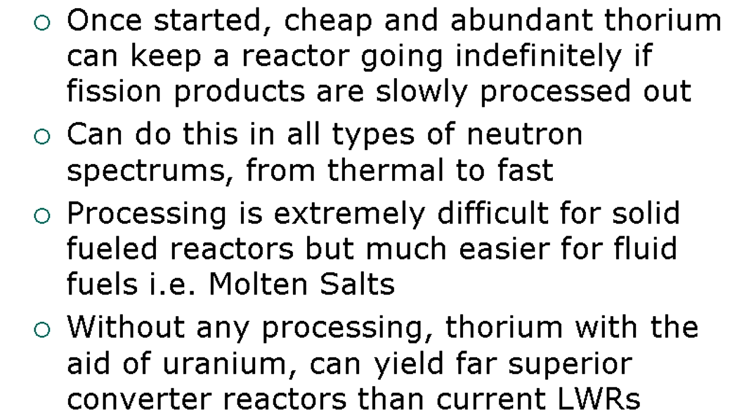Thorium is not fissile on its own. It doesn't fission on its own. We need a little bit of fissile material to start these up. Once started, though, we can run these on cheap and abundant thorium and keep the reactor going indefinitely on this. The great thing with thorium and the U-233 chain, it can be done in any type of neutron spectrum, from the more common thermal to the less used fast spectrum.

Processing of thorium, or processing in general, is extremely difficult for solid fuel reactors. That's why there's a little bit of interest worldwide, but really not that much. But since we're dealing with fluids here, it's much simpler for fluid fuels like our molten salts. It's easier processing, but it's still a challenge, and there's going to be a lot of R&D money needed to bring that forward. Without processing, thorium can be used with the aid of uranium.

A little bit of low-enriched uranium can yield far superior what we call converter reactors, or the simpler burner reactors, than our current light water reactors, LWRs.

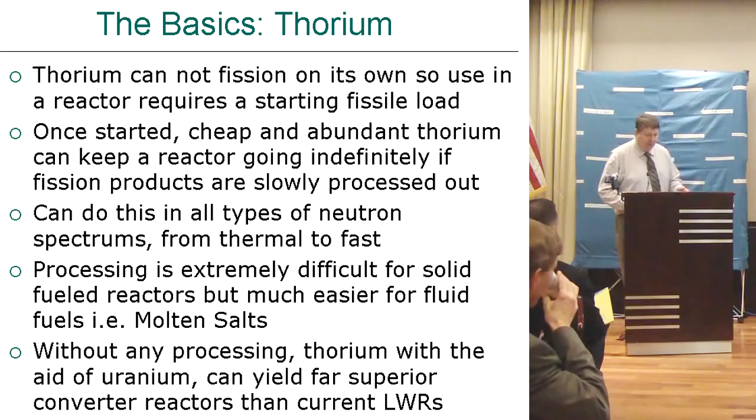Now, a little bit of basics about molten salt reactors. Molten salt reactors is the more broader term. LFTR is a bit narrower and a bit newer. But in general, our fuel, which is thorium and or uranium and or plutonium, it's dissolved in a carrier salt. FLiBe is one of the examples, enriched lithium and beryllium fluoride.

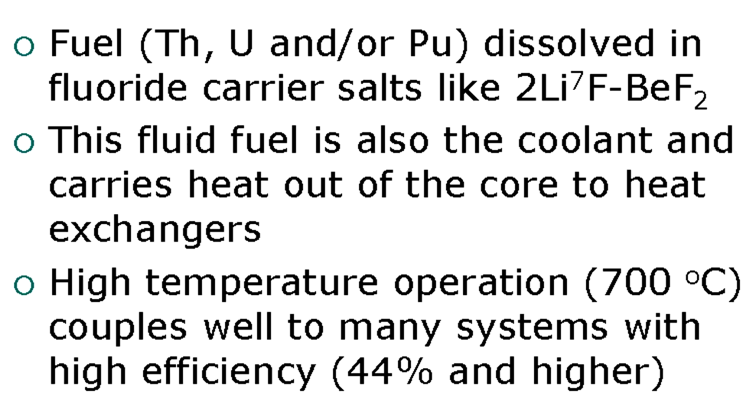This fluid fuel is also the coolant, and that carries heat energy out of the core to heat exchangers. It's a very high temperature operation, typically around 700 degrees, so that couples very well to almost any kind of power system you might imagine.

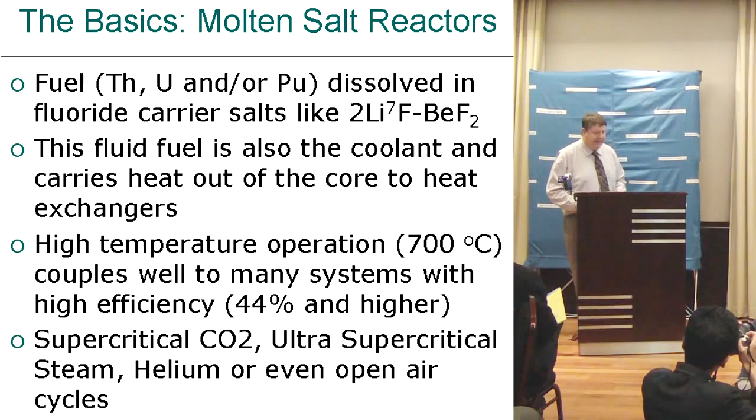A lot of us are going to be talking about Brayton systems, supercritical carbon dioxide, helium, etc., but it matches very well to general ultra supercritical steam as well, what the coal burners are using right now. So we can use off-the-shelf technology as well, even things like open air cycles.

The textbook design is called the single fluid graphite moderated molten salt breeder reactor. This is straight out of the Gen 4 program, Generation 4 program, to look at advanced reactors for the future. This is one of 6 of them.

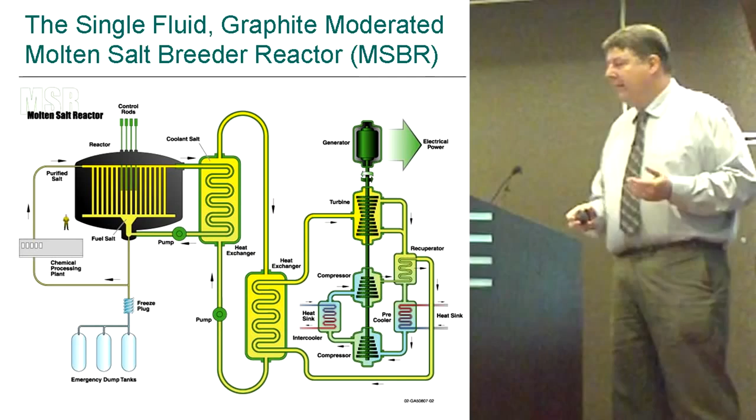In this design, the core itself is just a large tank filled with graphite logs, basically, that the fuel salt flows in, and in the reactor it's critical, so heat's generated. Then that same fuel salt flows out to a heat exchanger, gives its heat to clean salt, and then that clean salt will either, in this diagram, go to a Brayton cycle, or like I said, could be steam, could be almost anything.

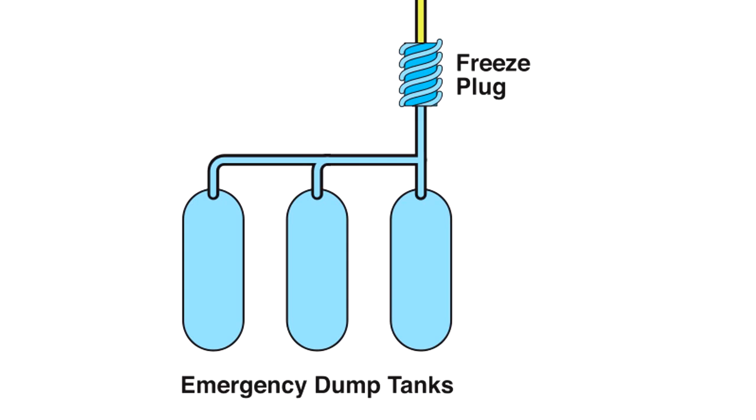Near the bottom we have this freeze plug, so basically if anything goes wrong, we lose power, etc., that freeze plug will melt, and the salts are drained to tanks that are specifically built to deal with that decay heat. There's a lot of design choices.

One is breeder versus converter. Breeder means it makes your own fuel after you start it up. And if we just make just enough to keep going, that's nice because we don't have to worry about shipping out any fissile material, etc. We call that break-even breeding, and most of us feel that's the way we should be going.

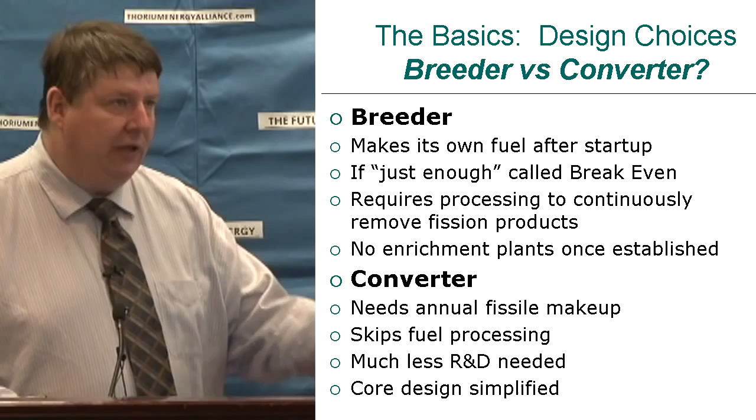That requires the processing of the fission products to continuously, fairly slowly, but continuously remove them. So we might need some enrichment plants now to get them going, but once we're going on them, we don't need enrichment plants anymore. Converter reactors, on the other hand, we need some annual fissile makeup, which is typically going to be low-enriched uranium.

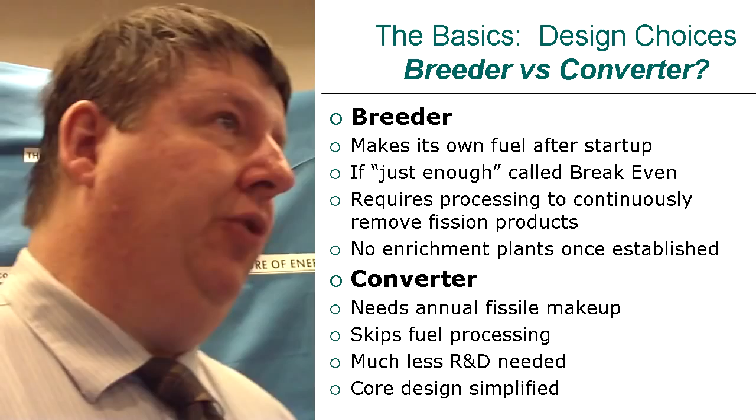But that skips fuel processing, or at least skips it for decades, and we do it once at the end of the sort of lifetime of the salt, etc. Much less R&D needed, much simpler designs. We're much more ready to go with things, and the core design is typically much simplified.

There's also what we call the single fluid or two fluid, and even confusingly, there's something called a 1.5 fluid. Single fluid, everything is one carrier salt, as is fairly obvious. The core design is typically a fair bit simpler this way.

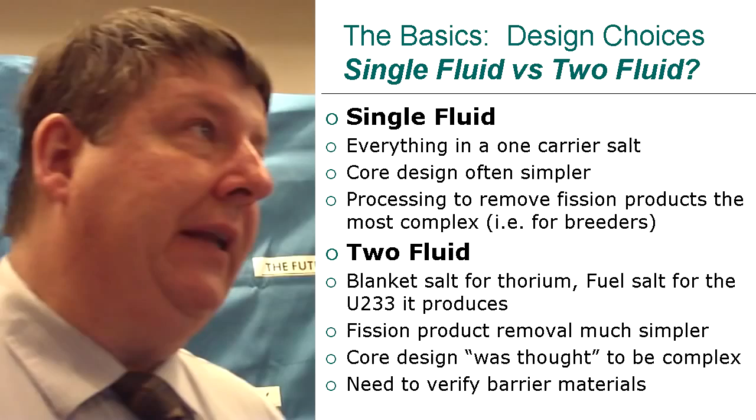Processing to remove those fission products is a lot harder. It's not as hard as solid fuels, but it's the hardest way with liquid fuels because thorium itself is very chemically similar to the rare earth fission products that are the most important ones to remove.

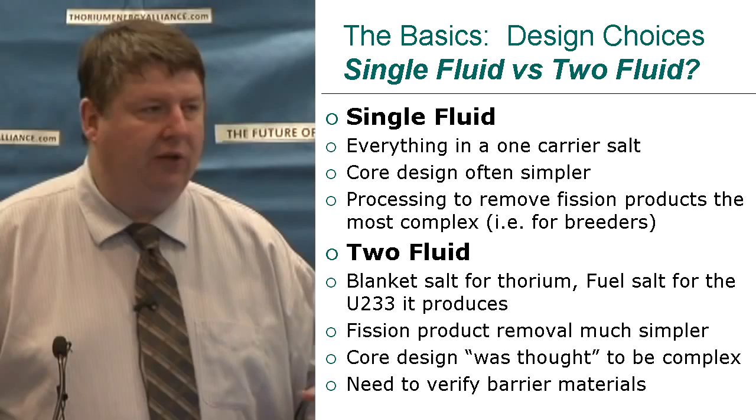Two fluid designs, on the other hand, have a separate salt for the thorium that catches neutrons, and a fuel salt for the uranium-233 that the blanket salt produces. Fission product removal is a lot simpler because the fission products are produced in the fuel salt and there's no thorium there, so it's a lot easier.

Core design was thought to be a lot more complex. What Oak Ridge looked at, Oak Ridge developed these in the 50s, 60s, and 70s. The design they looked at was very complicated. We think there's a lot easier ways to do this now.

But pretty much any kind of two-fluid design, we have to verify these barrier materials. It could be even graphite itself, but there's a lot of different choices to separate those two salts. Shouldn't be very hard, but it's something we need to do, and anything nuclear can be quite expensive.

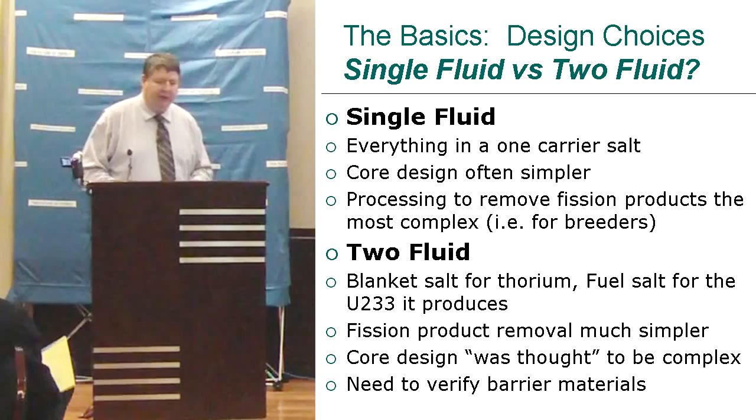Then we have either harder or softer spectrum between thermal and fast spectrums. Harder spectrum, or fast, we can skip using graphite. Graphite's not really that hard to use with these reactors, but if we can get rid of it, it's probably a good idea too. Just one less thing to worry about.

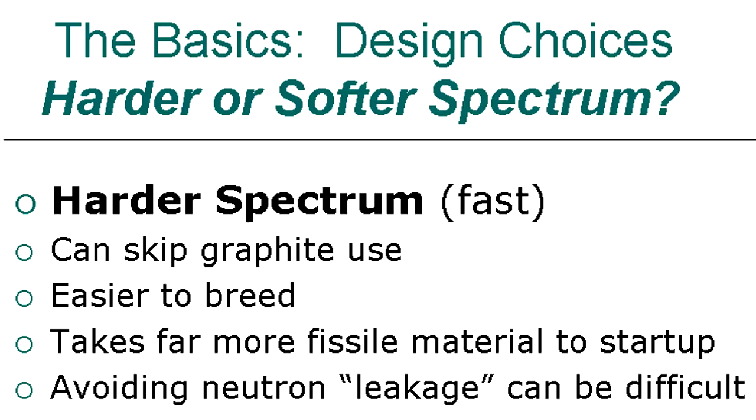Easier to breed, we get more neutrons per fission, etc. Although it typically takes a lot more fissile material to start up, and there's some exceptions, but that's a general rule of thumb. And avoiding what I call neutron leakage can be a problem. In a harder spectrum design, it can be, and especially in the single fluid, harder to avoid losing a lot of neutrons to leakage. We have this sort of neutron budget that we have to worry about.

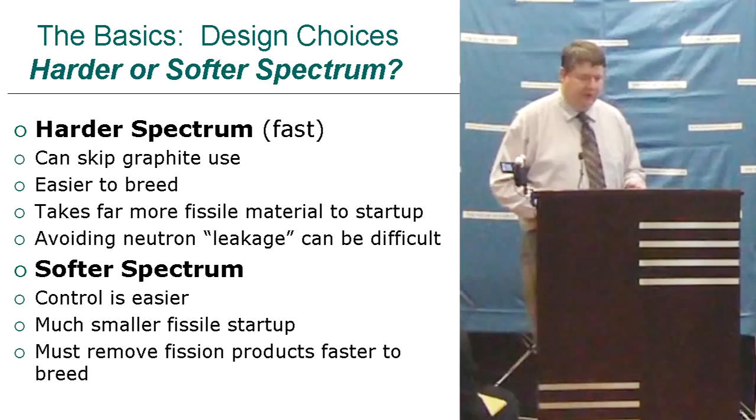With a softer spectrum, control is a lot easier as well. Things happen a lot slower with thermal neutrons. Much smaller fissile material to start up, but we need to remove those fission products faster if we want to breed or break even.

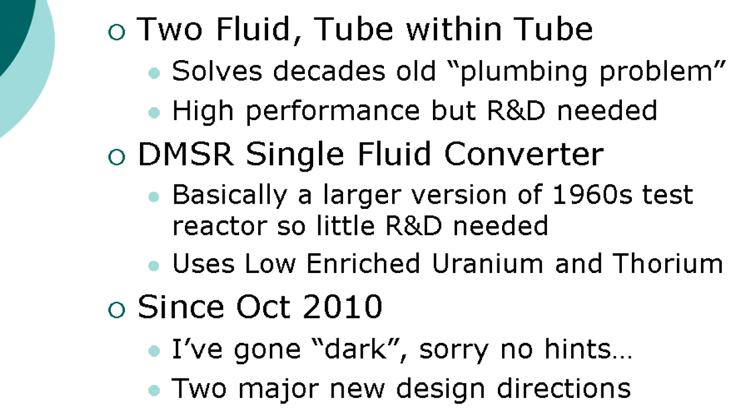Now, my main design efforts have been in a two-fluid design, what's called a tube within tube. Hopefully solves what Oak Ridge often termed their plumbing problem, which is the complexity they had to deal with. It's a very simple geometric trick, in a sense, to get good size power cores out of this two-fluid design with a much simpler plumbing, so to speak.

I sort of consider it high performance, biggest bang for your buck, but there's significant R&D needed in this design, and in most designs. My other main focus for the last couple of years has been on what's called the denatured molten salt reactor, DMSR. This was developed in the late 70s at Oak Ridge National Labs.

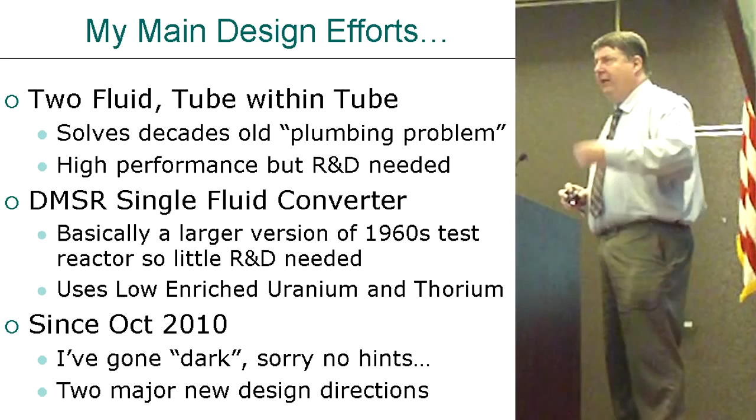It's a really simple design. It's basically just a larger version of the test reactor that they built in the 60s, so a lot less R&D needed. And now, it doesn't break even, so it needs a little bit of annual fuel, which is low enriched uranium, which is very, very much available. So it uses a mix of low enriched uranium and thorium. Most of the energy comes from thorium, but it's sort of helped along by that low enriched uranium.

Now, since October 2010, though, to use a term Jim Kennedy was using about the Chinese sometimes, I've sort of gone dark. So I've been working on a lot of new areas, but instead of going public right away with a lot of them, I'm keeping things a bit secret, so sorry, no hints, but quite excited, looking forward to sharing these with you.

Now, how do you judge a reactor in general? And that then guides us to what sort of design criteria we should choose. Of course, safety, cost, resource sustainability, and long-lived waste. I think these are really the most important, and pretty much every design we look at with molten salt reactors, these issues are very similar.

What can be a little bit different between designs is proliferation resistance. We have a good story in all our different types of designs, and it's a bit of an apples and oranges comparison. It's hard to make a really detailed comparison, but I think some can be labeled as extremely high proliferation resistance. Rapid deployment capability - if we want to build these by the hundreds or thousands to really make a difference, can we? And there can be some differences there. And then technological uncertainty, how much R&D we're going to need to move forward.

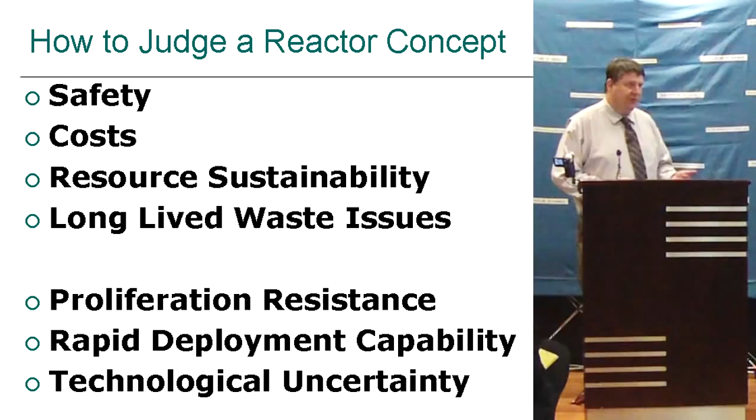Now, as I say, the advantage of all molten salt reactors is safety. We don't have large pressure vessels that could possibly fail. There's really no chemical driving forces here. We have no water, so no steam, explosions, or hydrogen production, and no zirconium water interactions. The graphite can technically burn, but that's about all it can do, and it's very simple to avoid that.

Some of our designs don't even have graphite. There's almost no volatile fission products in the salt. All these accidents, Chernobyl, Fukushima, it's the volatile things that go off into the air and spread out. That's the real issue. It's almost impossible to imagine how radiation can spread from a nuclear reactor beyond that. They get into bizarre scenarios, the corium hitting water in a certain way, water getting inside the corium and then exploding. They really have to be imaginative beyond these volatiles.

But with the molten salts, those volatile elements come out naturally while we're running. We collect them and store them completely separate from the reactor. So if anything goes wrong, even a terrorist attack or a missile strike, you might splash some salt around, but it basically lands and hardens, and very, very little will come out of it.

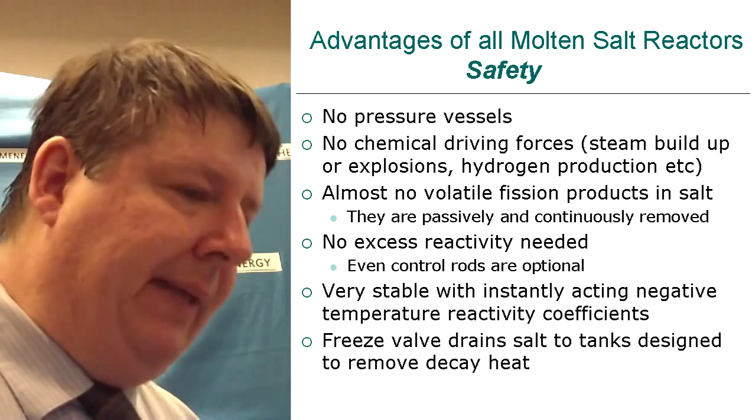We don't need any excess reactivity. There's no shim rods or control rods that could be accidentally removed. We don't need any of that. They're very stable, with instantly acting negative temperature reactivity coefficients. And again, we have that freeze valve to lead the core, lead the heat to where we can deal with the decay heat best.

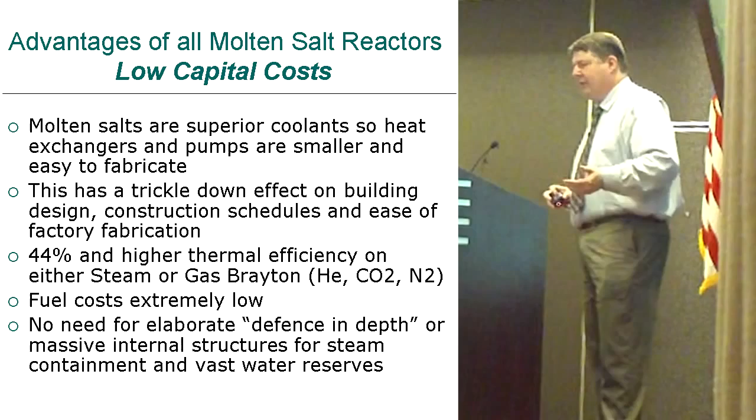Low capital costs. Molten salts in general, this is not quite as well known, are just excellent coolants, much better than water, much better than liquid sodium, etc. So your pumps are smaller, the heat exchangers are smaller, and that makes things a lot easier to fabricate. This has a trickle-down effect on your building layout, construction schedules, factory fabrication, etc. Of course, we have a much higher thermal efficiency, 44%. We could probably push 50% with these, given our various choices, and that's another wonderful thing, that we have so many choices.

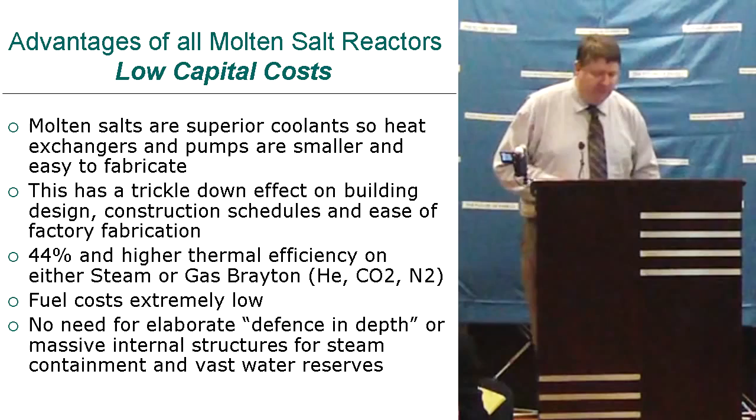And of course, the fuel cycle costs are very, very low, and there's no need for extra engineering since we have all this passive safety—things happen by physics, not by engineering design. We don't have that defense in depth, or these massive internal structures to deal with steam containment and vast water reserves.

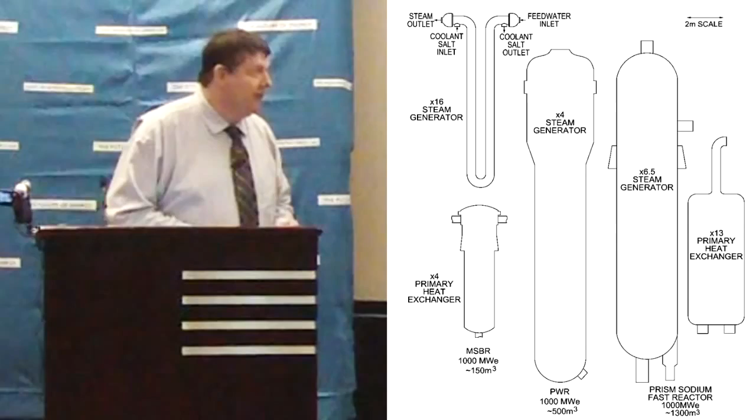Just looking at the size of the heat exchangers on the far left, we have the primary heat exchanger. We need 4 of those for a 1,000 megawatt plant, and 16 of these tiny little steam generator tubes, versus, in the middle, 4 of those very large 70-foot tall steam generators that the PWR folks need to work with. And the sodium cooled fast reactor people love to show how tiny the reactor is itself, but they tend to neglect showing the absolutely massive water-to-liquid-sodium steam generators and their primary heat exchangers as well. So their volume is just an enormous factor compared to ours.

Resource sustainability: once we start these breeder reactor designs, if we're running them as breeders, all we need is minor amounts of thorium a year. So about $30,000 worth of thorium gives you, depending on your price per kilowatt, about $500 million worth of electricity. Converter designs are a lot simpler and do require some uranium, but very modest amounts. Typically, Oak Ridge's base design, which we can improve on, was about 35 tons of uranium per gigawatt-year, a 1,000 megawatt plant running for a year, versus about 200 tons for light water reactors.

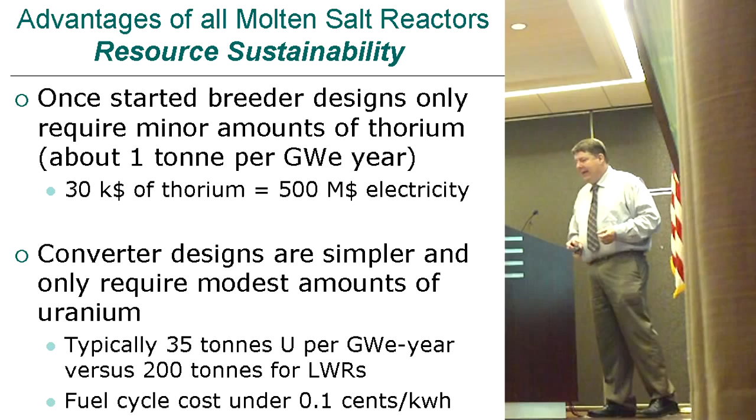And that gets a fuel cycle cost under 1/10 cent per kilowatt hour, so there's not too much room for improvement there anyway. And I would bring this up: uranium is not really the enemy. Thorium isn't amazing on its own, but these reactors can help us use uranium a lot better as well.

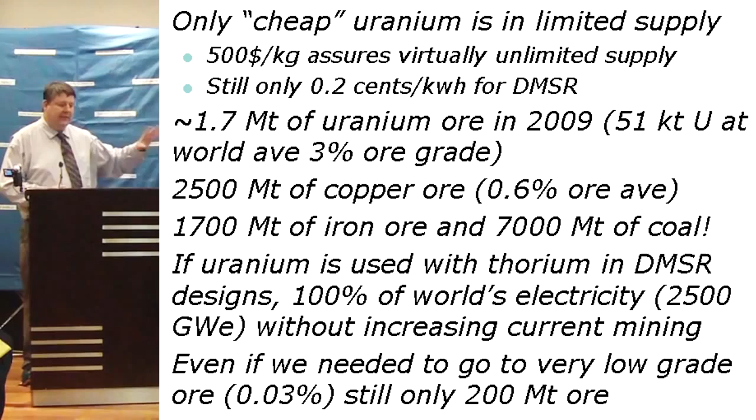We're not going to run out of uranium in 80 years. We can run out of cheap uranium, and that can start to hurt the light water folks because they need so much of it. But if you talk to competent geologists who know their field, they'll tell you there's no way uranium could ever be really more than $500 a kilogram, because then we'd have so many low-grade ores that would become economically viable. And even at $500 a kilogram, in designs that use it, that's still only a couple tenths of a cent per kilowatt hour.

Now, mining is maybe not pretty in general, but 1.7 million tons of uranium ore was dug up in 2009 at a world average of 3% ore grade. You have to compare that. Mining's not pretty, but there's 2,500 million tons of copper ore, 1,700 million tons of iron ore, and 7 billion tons of coal.

So the mining picture here is a pretty minor one. And if uranium is used with thorium in the DMSR designs, we could have 100% of the world's electricity, 2,500 gigawatts, without increasing the mining we're doing already. And even if we needed to go over to very low-grade ores where it might cost $500 a kilogram, there's almost unlimited supplies then, that's still only a couple hundred million tons of ore mined per year.

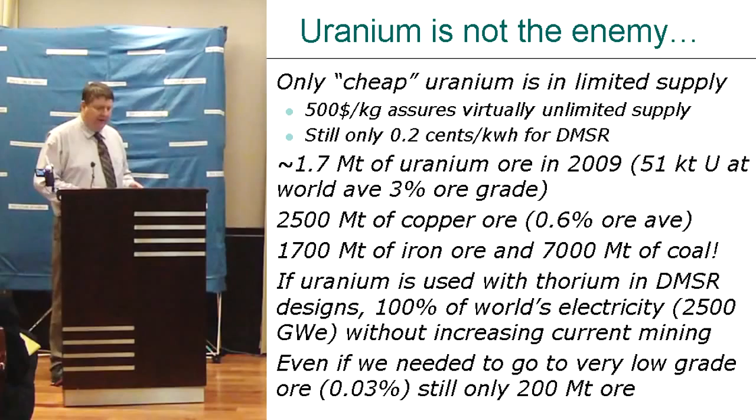Long-lived waste, that's another great story for molten salt reactors, LFTR in general. The fission products are very similar to almost any reactor design, but they're almost all relatively benign after a few hundred years. The real problem is what we call the transuranics, things above uranium - neptunium, specifically plutonium, and even above that. That's the real reason you have Yucca Mountains, which are repositories. They're built so that 100 years later we can come back and take that out, because you also don't want to bury plutonium for generations.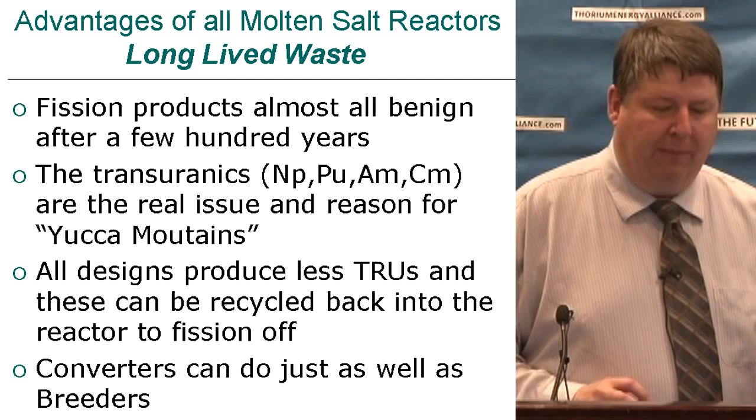All the molten salt reactor designs, regardless, produce a lot less transuranics, and we can keep them in the salt, or every time we process, make sure we put them back in the salt. It's surprising to many, but I can show you the numbers if you don't believe me. Converters can do just as well as breeders in that. Converters will produce a little more plutonium a year, but you only have to process it every 10, 20, 30 years, so the picture can look just as well.

That blue line is the actinide waste, that's the transuranics, and that's what is so nasty for so long - this is logarithmic on both scales, so going out into millions of years. That's what takes so long. The dashed line is the fission products, and they drop like a rock for the first few hundred years, and then there's a few left that are just low energy beta emitters, etc. Nothing too much to be concerned with.

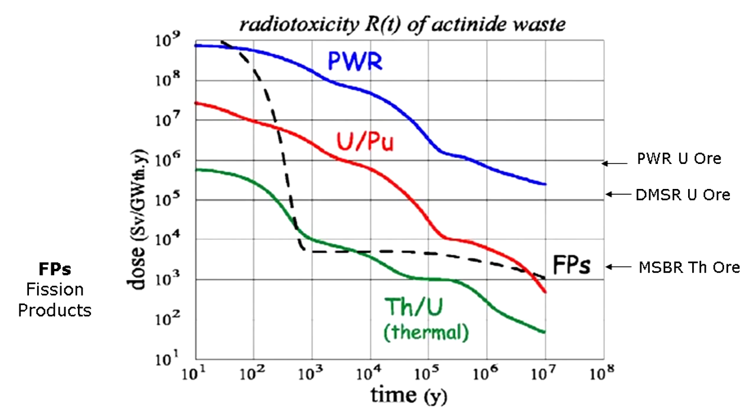The red line shows for a fast breeder, the sodium guys, and then this green line is for the molten salt breeder reactor, and that would be a very similar line for even the converter reactors. These arrows I have on the side, PWR U ore, DMSR, and then the MSBR on thorium, that shows when we run these reactors, how much radiotoxicity we're actually destroying in the world, or transmuting. And the DMSR design, we can do pretty much as well as the breeder, but we actually destroy a lot more natural radiotoxicity. So it's probably the only reactor design in the world that can claim that when you run these reactors, 300 years later, when the fission products have died away, we've actually lowered the world's radiotoxicity. No other design. So we're doing the world a favor doing that.

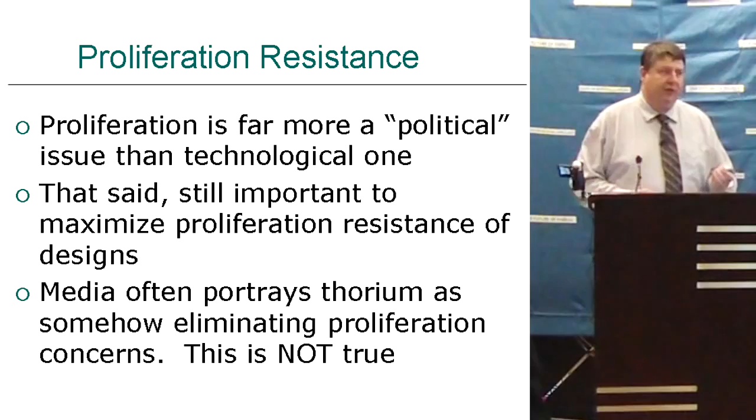Now, proliferation resistance is mainly a political issue, okay? If a country wants it, they're going to build simple graphite pile reactors, etc. It's not really a technological issue. But that said, we still should do whatever we can to maximize proliferation resistance of designs. Now, I will mention, though, that the media often portrays thorium as somehow eliminating proliferation concerns altogether. This is not true, and that's important to understand. It can really help us, but it's still something we have to be vigilant about.

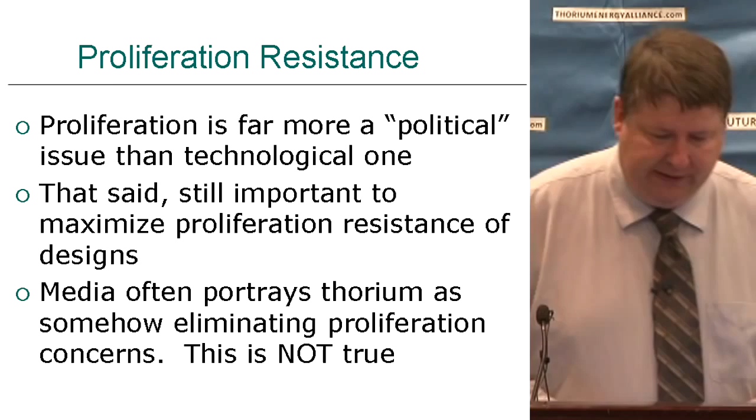Proliferation resistance of the pure cycle, what we might call the breeder cycle, the big benefit is from something called uranium-232. It's there a long time. It's got a 69-year half-life, and one of its daughter products makes a really high energy gamma ray. Extremely easy to detect if anyone was trying to smuggle this around, and makes it really hard to work with. And no national program has ever been based on uranium-233. We can also instantly denature these by dumping in uranium-238, and that makes the uranium useless for any kind of weapons.

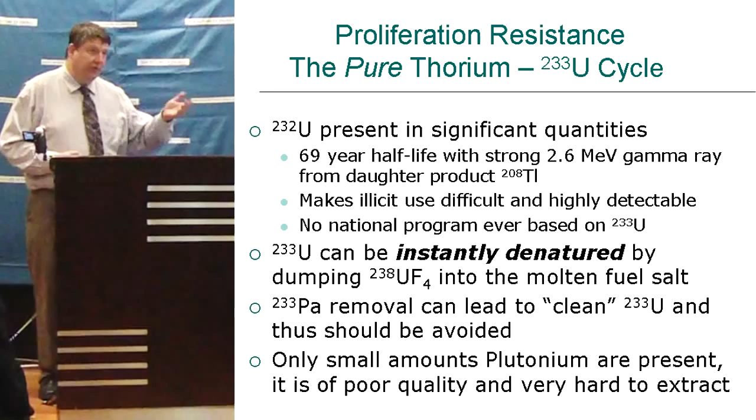Protactinium removal, I won't get into details here, but that can be eliminated in any design, even single fluids, believe it or not, for those that know a little bit here. But that should be avoided because that can lead to what you call clean 233 that doesn't have that 232 contaminant. And in these designs, there's only small amounts of plutonium, and it's really, really poor quality, pretty much impossible to even ever imagine. Denatured cycles, though, and this includes the converter designs, with the pure cycle, it does represent highly enriched uranium.

Those three words together will be a non-starter for a lot of people, and it'll be hard to even get them to look at things.

But if we run them denatured, there's pros and cons to that, but that makes any uranium completely useless for weapons. It does mean we're going to have a bit more plutonium, and it's surprising that there's not a big difference in how much plutonium will be in the salt, but plutonium is a lot harder to remove from the salts than uranium, and it's really poor quality plutonium.

It's debatable whether light water reactor plutonium in the waste could ever really be used to make a weapon. In the DMSR approach, it's much poorer—about triple the spontaneous fission rate that makes things go prematurely, and a lot more heat production. The DMSR approach has been singled out in some studies as probably having the highest proliferation resistance of any possible reactor.

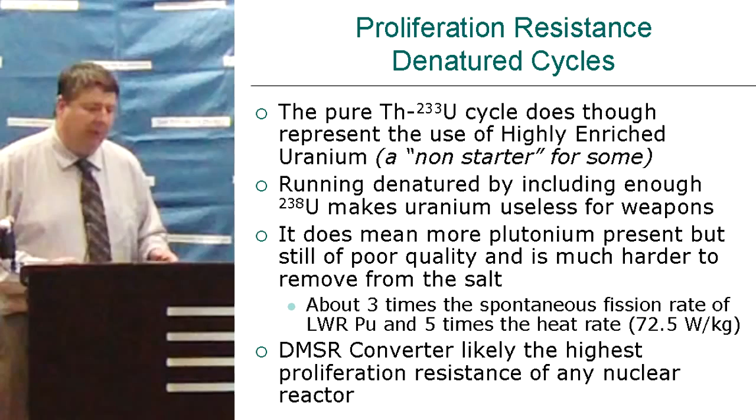Rapid deployment capability is basically about how much fissile material we need to start it. There's also the technological issues—these designs are generally a lot easier to build than light water reactors, but one of the differentiators is how much fissile material is needed to start and what type.

We don't really have any U-233 in the world. There's a little bit here that we're trying to save in the United States. Spent fuel plutonium—everyone talks about that, but it's quite expensive to get at, and it's also somewhat limited.

Fast spectrum, single fluid, or 1.5 fluid designs need a lot more fissile material to start, up to about 8 tons per gigawatt electrical. It's still a little less than the fast breeder designs, but it's still a lot.

It would impede development. 2 fluid breeders, or any denatured design, we can start those with low enriched uranium. That's another advantage of the 2 fluid design.

Another question: can we make these small to start? There are differences there. The 2 fluid designs with what I call a full blanket around them, we can make them pretty much as small as we want. Please don't start thinking we're going to have them in your basements or your car—that's ridiculous—but we can make them quite small in power.

Single fluid graphite converters—the neutron budget gets worse as you get smaller, but you're not trying to break even, so yes, we can make those pretty small.

The conventional design, the single fluid graphite breeder that tries to break even, is actually very hard to make very small—more like the 1000 megawatt size. And the single fluid fast breeder, which the French have the most well-known design for, is very hard to shrink as well.

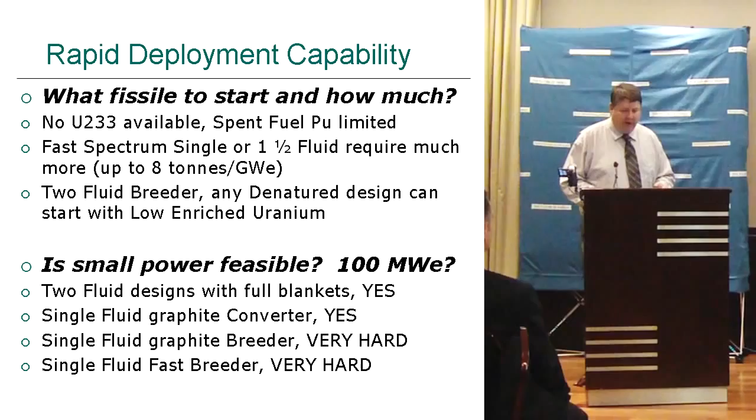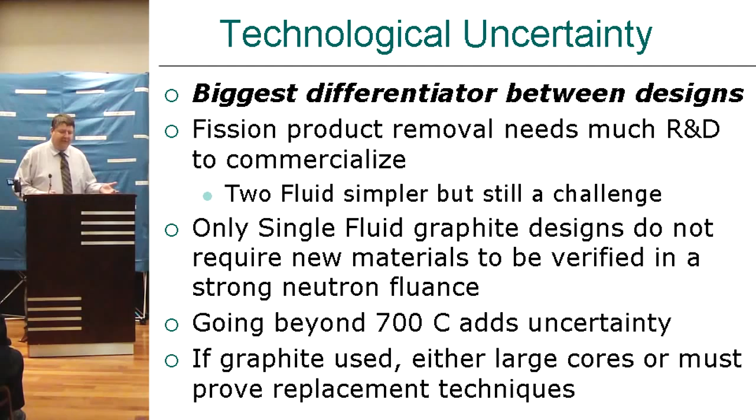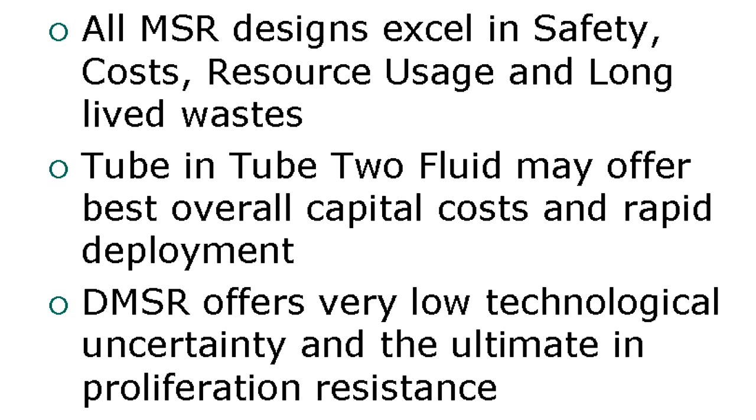In summary, all molten salt reactor designs excel in safety, cost, resource usage, and long-lived waste reduction. I think the tube-in-tube, two-fluid design I've been promoting may offer the best overall capital cost and rapid deployment. The simpler DMSR design offers the very lowest technological uncertainty and really, really high proliferation resistance.

They're all high—I think the DMSR is the absolute highest, though. The inherent features, the physics of them itself, favor overall safety, waste reduction, cost, and deployment.

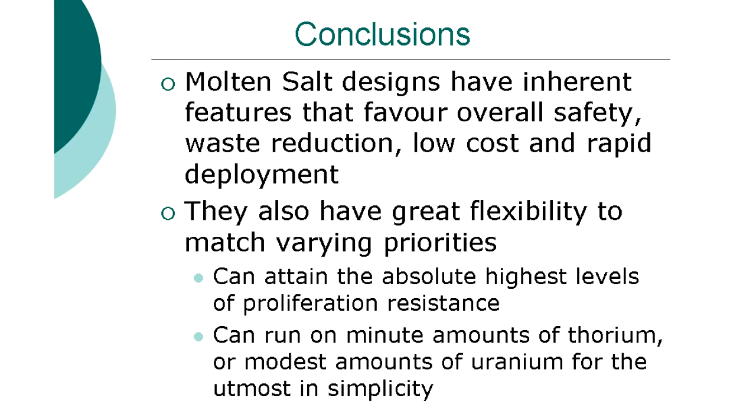But they also have a lot of flexibility. We can attain the very highest levels of proliferation resistance, or we can run on minute amounts of thorium or modest amounts of uranium with thorium for the utmost in simplicity.

There's a lot of things going on in the back rooms that many are not aware of. It's exciting times, but sorry, not quite ready for public disclosure. That's all I have to say for now.